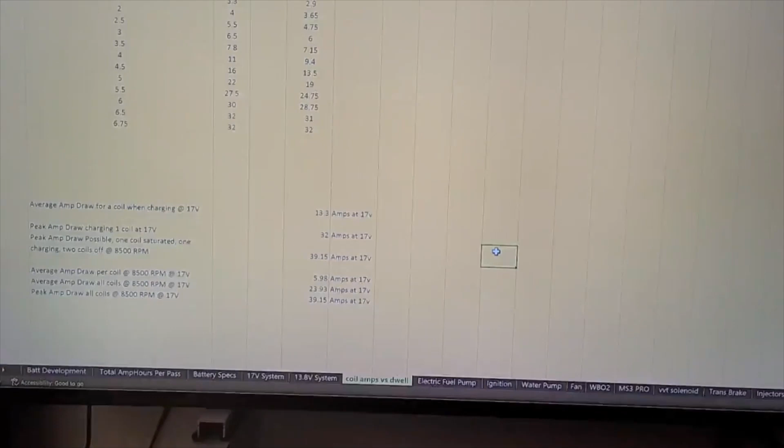We're going to answer how much power does each individual component pull, and the two big questions: what is the average amp draw for one race, and what is the peak amp draw? Both of those numbers matter. The average is for battery size, but the peak, the system's got to be able to supply that peak power.

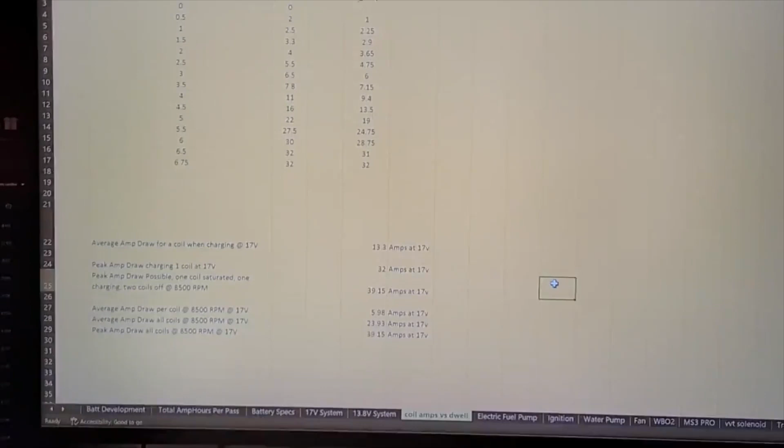So let's take a look. We already covered the coils in the last video, so we'll just summarize. The average draw is 13 amps, and our peak draw is about 39 amps.

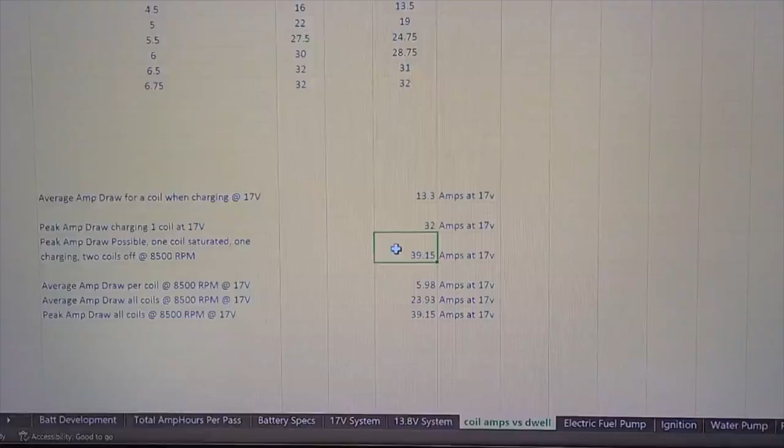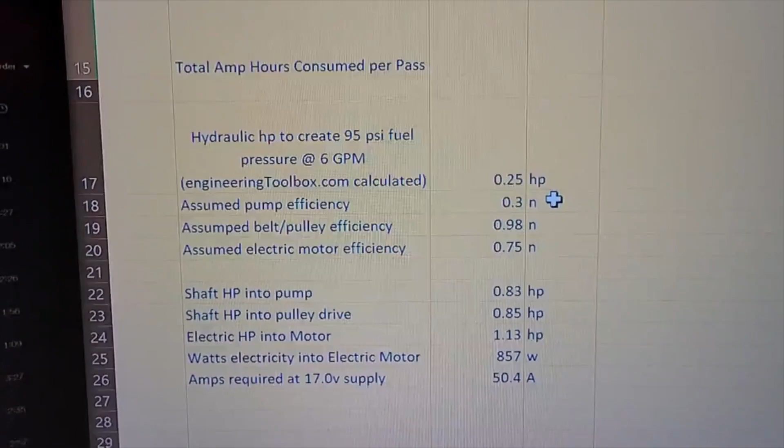Now let's go to the fuel pump. We're going to run a 6 gallon per minute pump at about 95 psi. I used a calculator online and plugged in the numbers, and that takes about a quarter horsepower to create that much flow at that pressure.

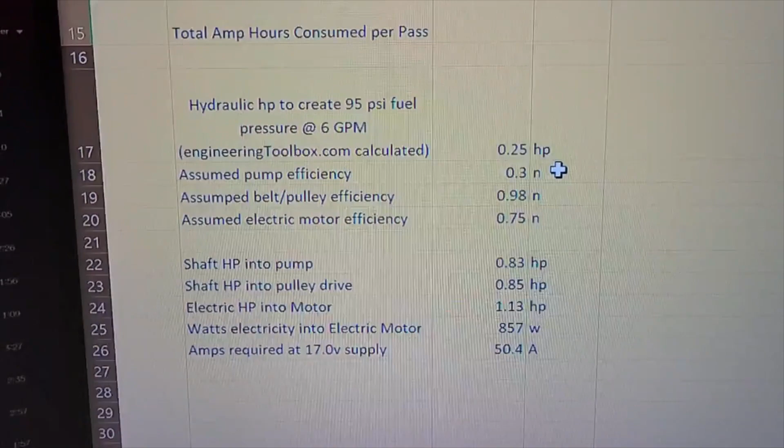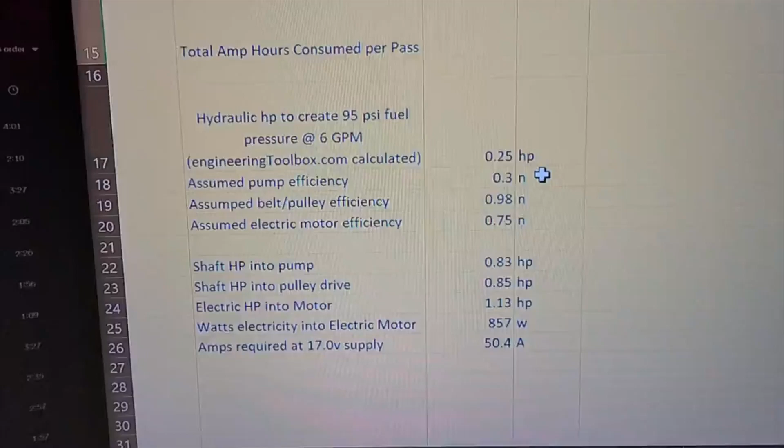That's hydraulic horsepower. Now for pump efficiency, we're assuming a terrible 30% efficiency. We hope our pump is better than that, but we are pumping thin fuel and I don't really know what the efficiency is, so I assume something terrible. Because of that, we also put the belt and pulley, because we're going to have to run that, so we got that at 98% efficient. And the electric motor, we got that at 75% efficiency.

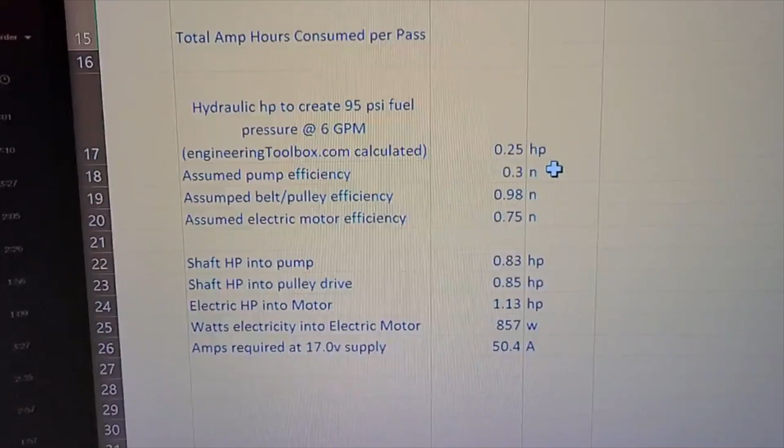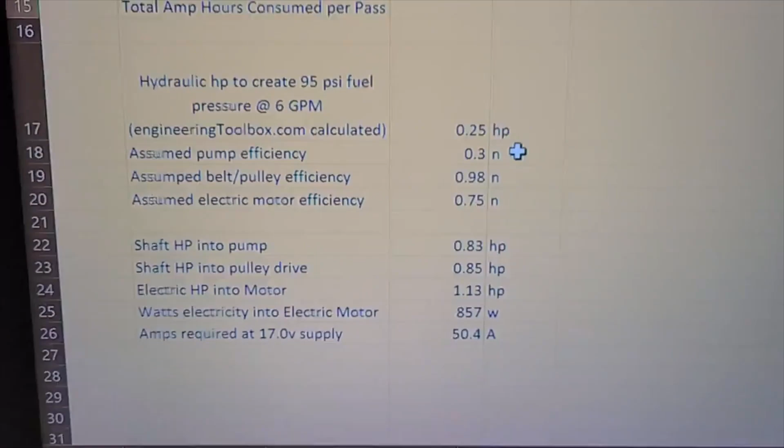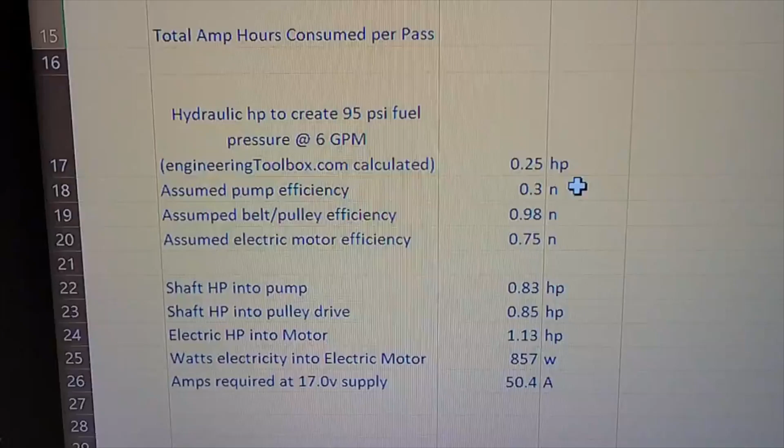So when you take all that into account, what you find is our shaft horsepower going into the pump is about 0.83, and that's because of the terrible efficiency. That number just goes up from there. Doing the pulleys bumps it up to 0.85, and the electricity going into the motor to create that shaft horsepower, due to the motor efficiency, we're up to 1.13.

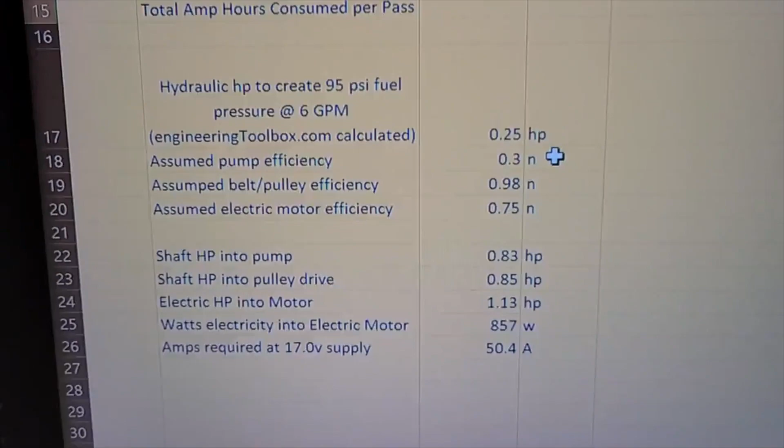Converting that into watts, that's 857 watts, and if you're supplying 17 volts, that's 50 amps. So at 17 volts, the electric motor is going to pull 50 amps. Now like I said, it's probably worst case. Hopefully it'll be less because the efficiency is not so bad, but let's roll with that.

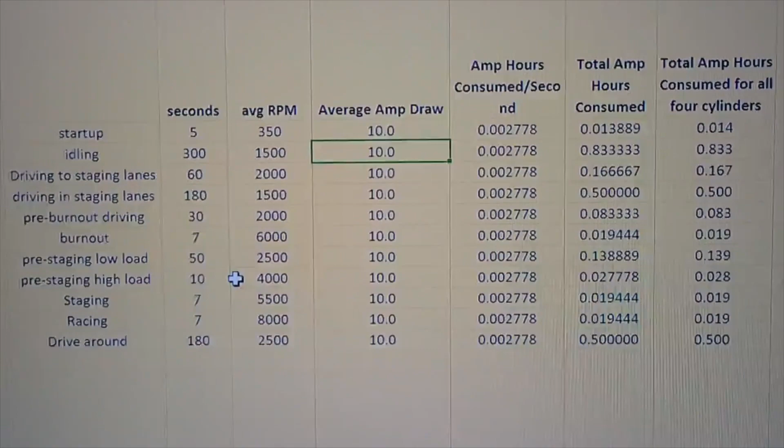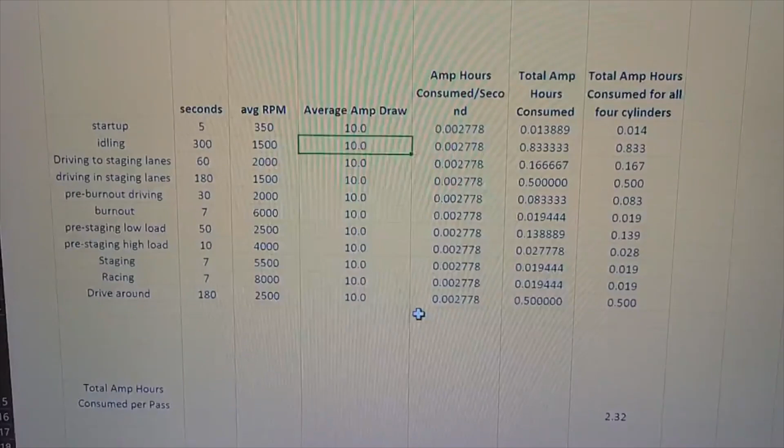We already covered our ignition. Let's jump over to the water pump. This one's pretty easy. I found a water pump that pulls, it says 10 amps max, but typically 9 amps. But hey, it says 10 max, so let's go with that. We're just going to assume that we run the pump at full speed all the time, which is probably what we're going to do anyway. So that's real simple, 2.3 amp hours.

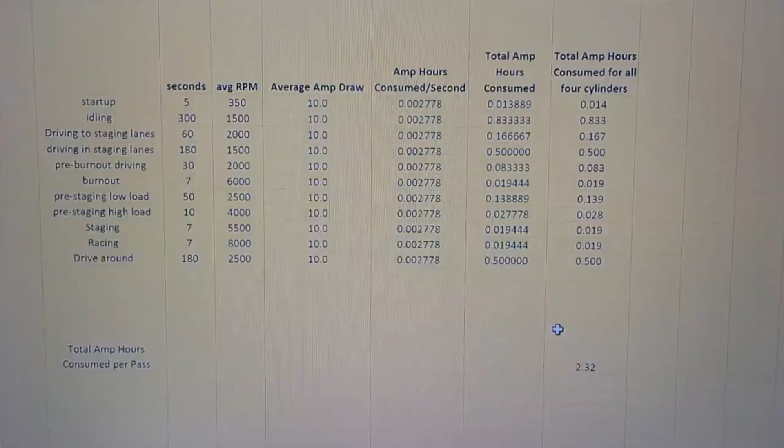We'll go to our fan. Same thing, it's a cooling system component, so we're just assuming 100% cooling at all times. We may not actually do that, but I want a system that I have full cooling, and I take that into account.

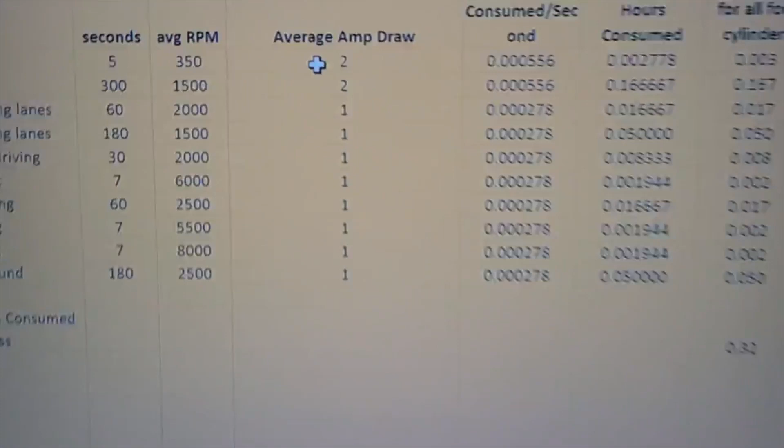Next tab is our wideband. So widebands, these things start off pulling more current because it's got to heat the sensor up, but after that they don't run as much. So you can see we backed off on that. We ended up with 0.32, so not too much.

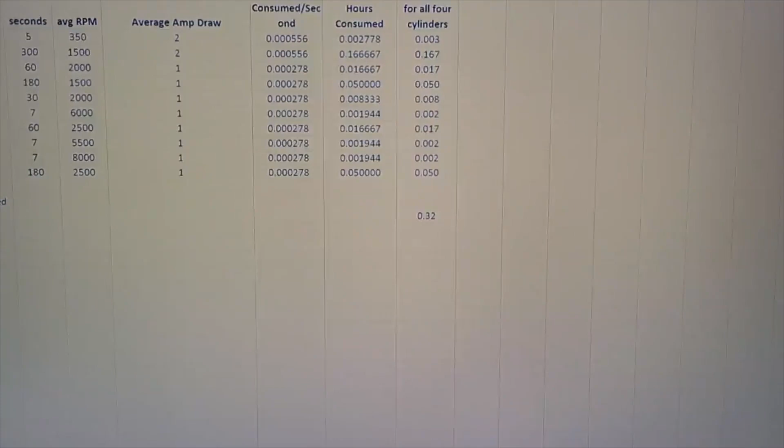Next is our ECU. We just did 1 amp. I couldn't actually find a number for this, so I just assumed 1 amp. That's probably close. That gives us 0.23.

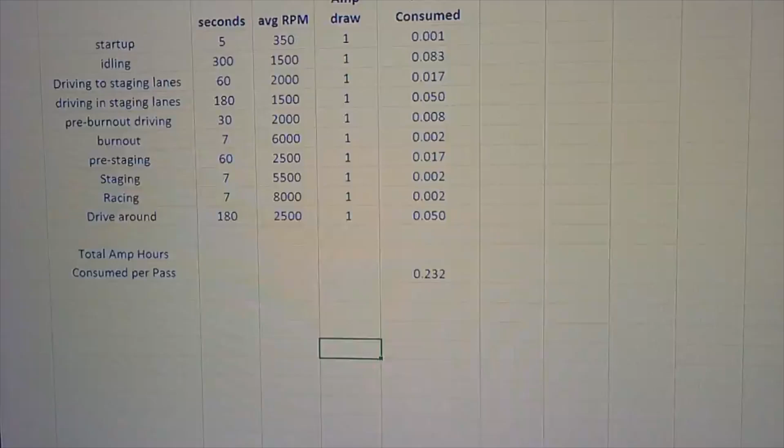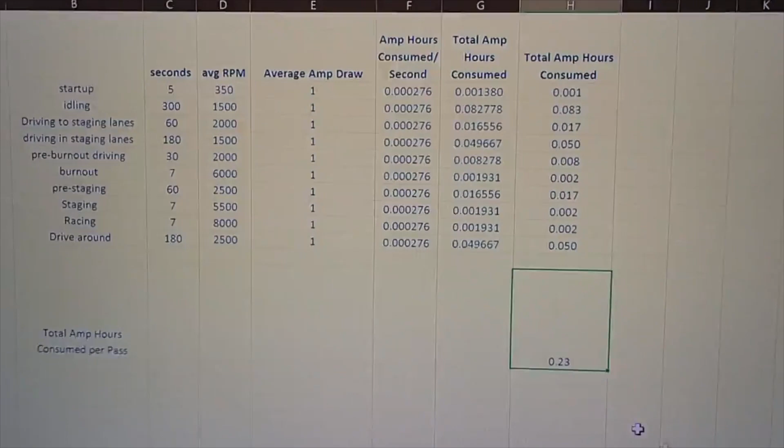Next we got our VVT. I don't actually know this number either, so I just put an amp, and it only comes out to 0.23, but I mean it's not much. That's like a quarter of an amp hour, so if we're off a little bit, not a big deal.

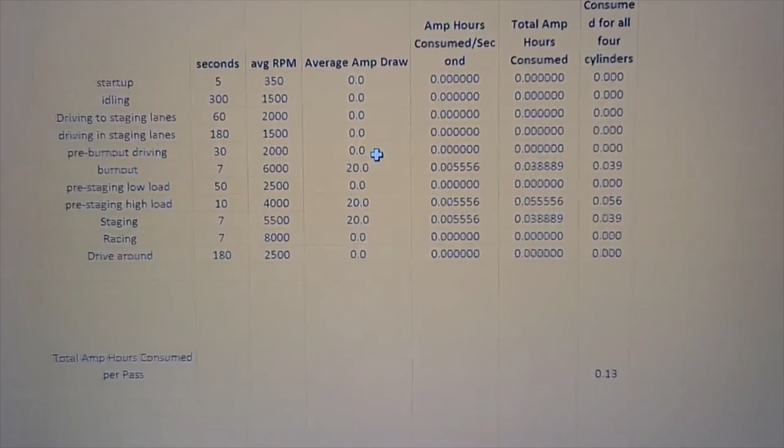The pre-stage and staging, we've got 20 amps for each, so that's basically 1 minute total. I doubt we're going to do that much, but we're trying to budget for worst case. So that gives us 0.13, not really much anyway.

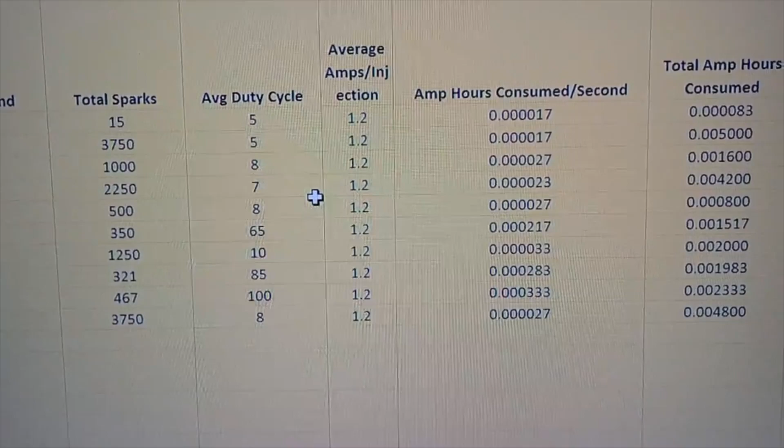Go to the injectors. We're doing 1.2 amps per injector, and we do have 4 injectors. But most of the time the duty cycle is low. You can see here in our graph that we actually took duty cycle into account when we were doing our calculations. It only ends up being 1/10 of an amp hour, not much.

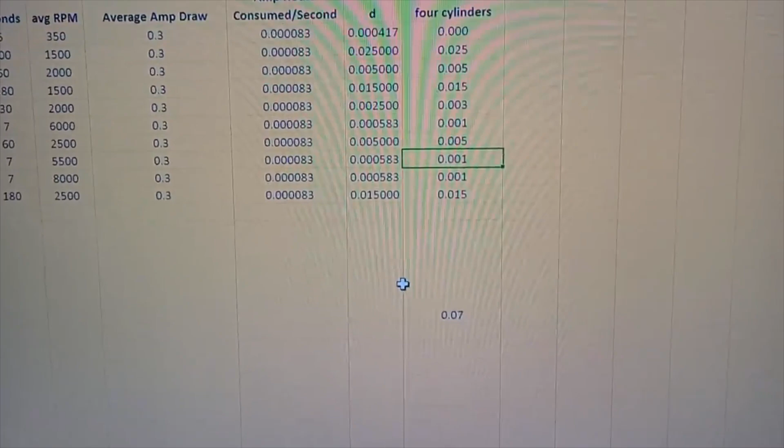Last thing is our running lights. We just did 0.3, we're going to do an LED conversion, and it ends up being some tiny number. All right, so that's our pieces. Now let's go into, we kind of got 3 things.

We got a 13.8 volt system, a 17 volt system, and then we'll look at the battery. So let's go to our 13.8.

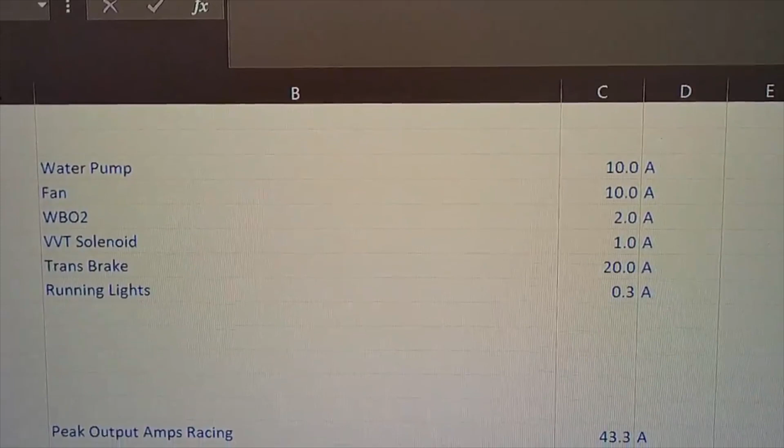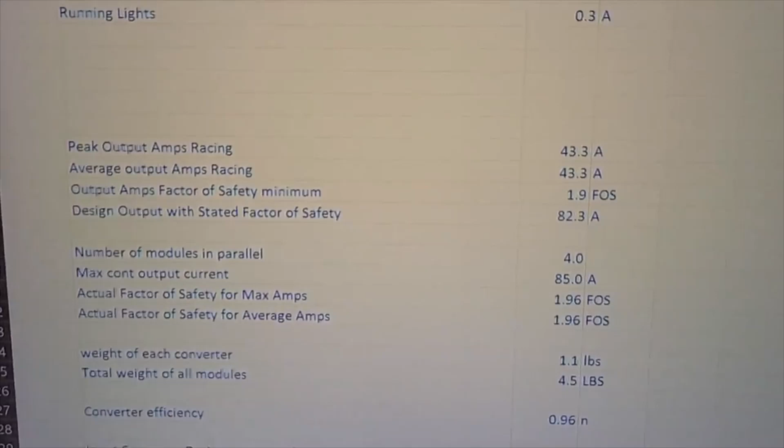So here's our amp numbers, these are the peak amps. Well actually in these parts the peak and the average are basically the same. So we look down here, here's our peak and our average, around 43 amps.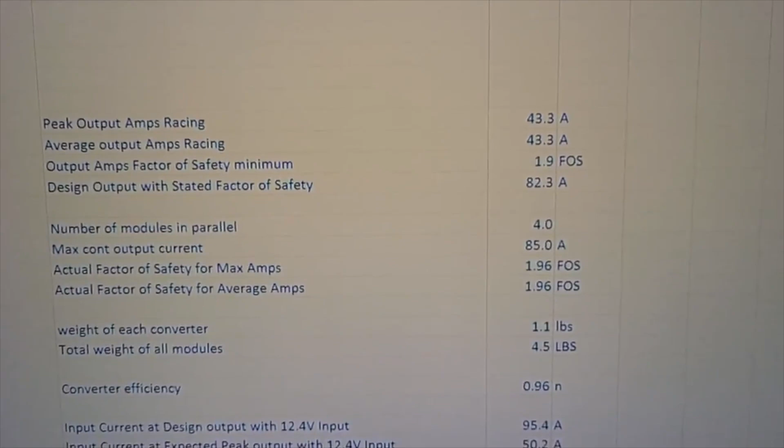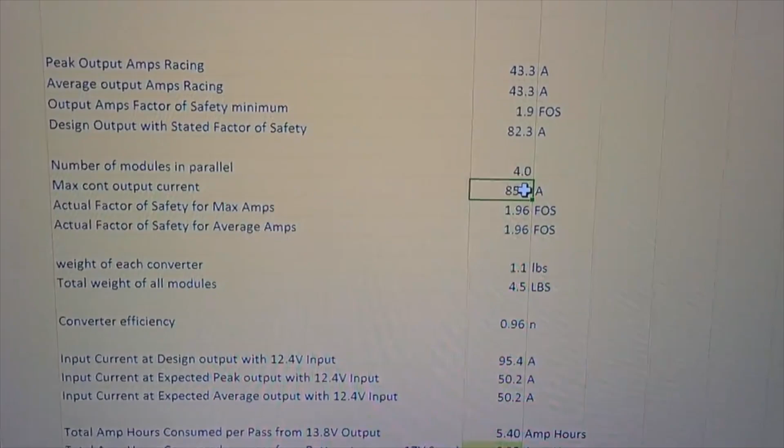Now I'm putting a factor of safety of 1.9 on this, so that means we're calling out for an 82 amp design output. Now the pieces that I'm using, I got to put them in parallel. They're rated for 25 amps each, but I'm derating those some just for reliability. So here I assumed that we run them at 85% of their 25 amp rating.

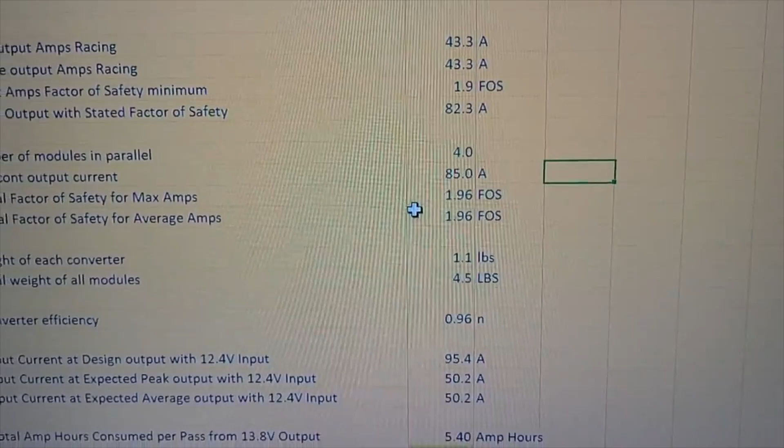So 4 of those, we end up with 85 amp output, which gives us a factor of safety of 1.96. So this thing's basically double what it actually needs to be, which is good because if we ever add anything in the car, we've got that extra amp capacity.

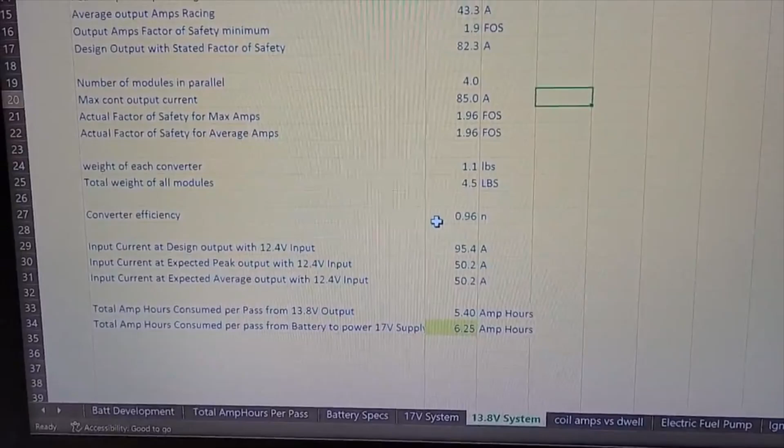Here you can see the weight of these parts is about 1 pound a piece. These are pretty efficient, 96%. And then check this out, here's our input current at the design output with a 12.4 volt battery supply.

So we'd actually be feeding these things with 95 amps. Now that's to get the 85 amp max output. However, if we just look at our expected numbers without the factor of safety, then we're looking more at about 50 amps going into this thing, and that's from the battery.

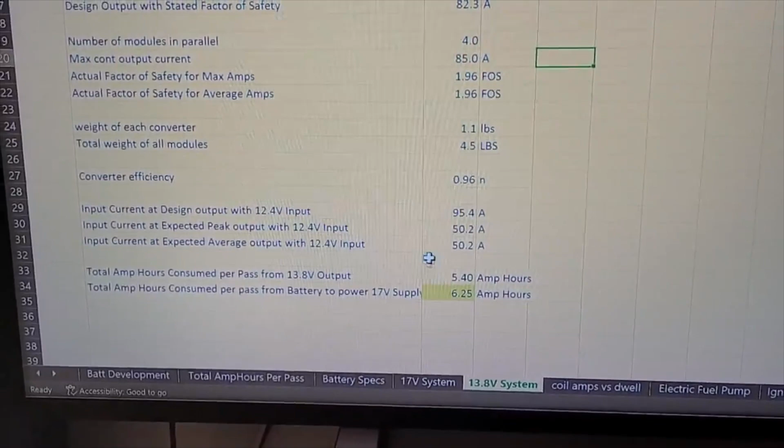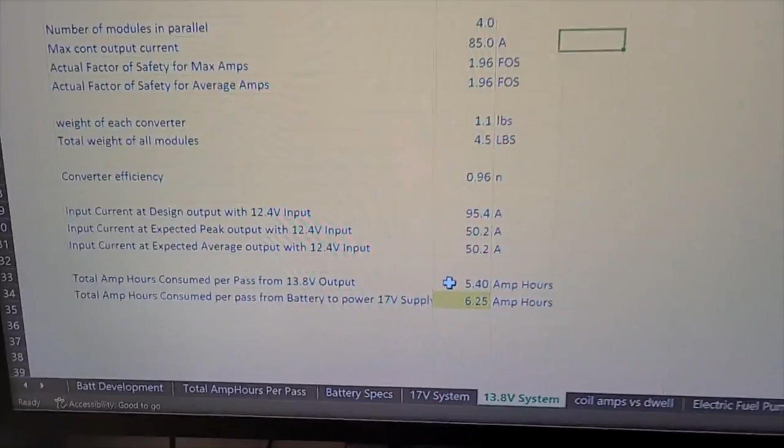And then down here at the very bottom, this is our amp hours. So since we're not going to take an hour to make a pass, it's only going to be a few minutes for all the driving. It ends up being 5.4 amp hours coming out, or that's the output to feed everything. So from the battery, it ends up being 6.25.

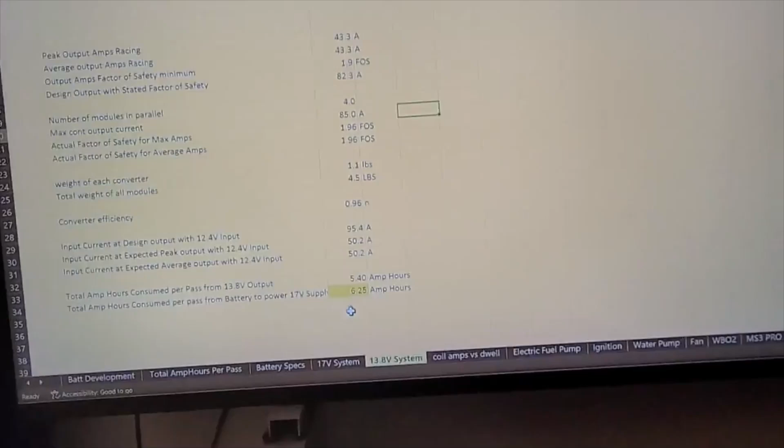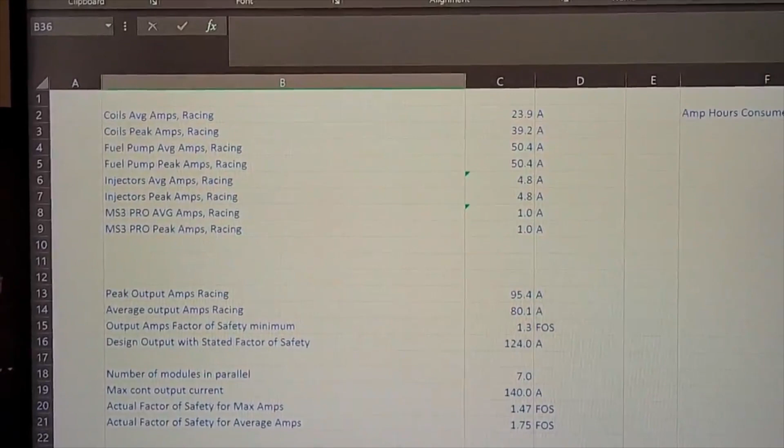So not too bad. Let's jump over to the 17 volt system. So here you can see our coils. We have different numbers for average and peak, but everything else, the averages and peaks are the same. So we have to take that into account.

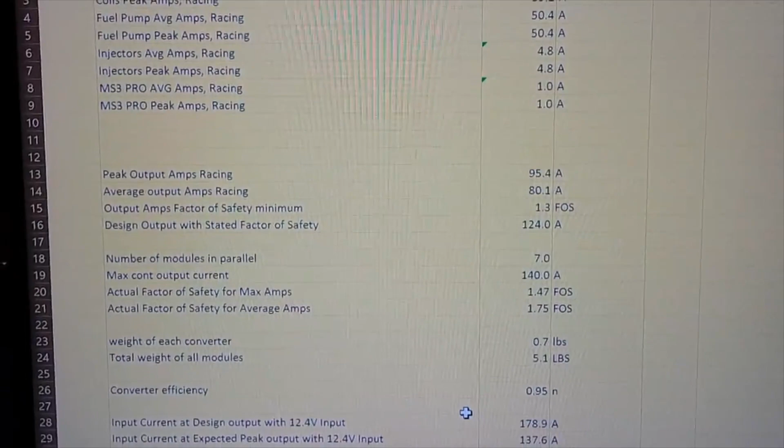But these are big numbers. You can see compared to that other one, we're looking at big numbers here. So our peak output when racing, we're looking at 95 amps, and again that's at 17 volts, but an average of 80.

So we threw a factor of safety of at least 1.3, and that puts us at a design output of 124 amps. I'll admit I kind of want to bump that factor of safety up, but let's run with that for a second. So here you can see we have to spec 7 of these guys.

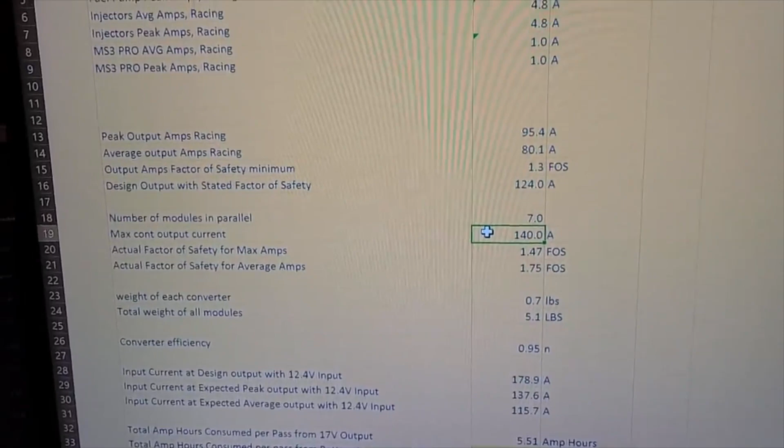We're using 20 amps a piece. They're rated at 22, but we're derating them a little to 20. So that gives us 140 amps of output, which means our factor of safety for the maximum current is 1.47, and for the average, 1.75. So that's actually not that bad.

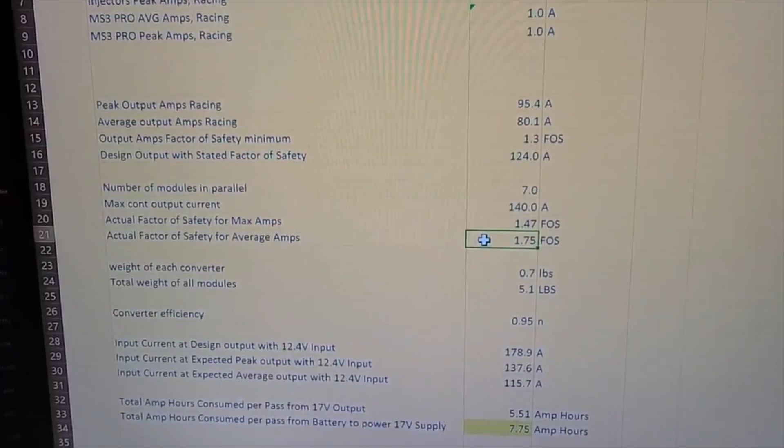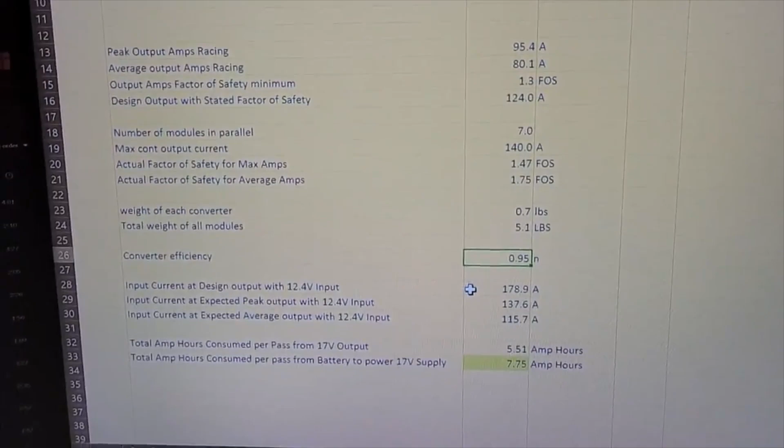These converters are 0.73 pounds, so we end up with about 5 pounds of converter. Assume 95% efficiency, which is what they publish. Look at these numbers, this is high.

So the input current at the design output, this is how much current the 17 volt system pulls when it's running at its designed output amps and you're feeding it with a 12.4 volt signal. You get 178 amps, basically 179 amps feeding into this thing.

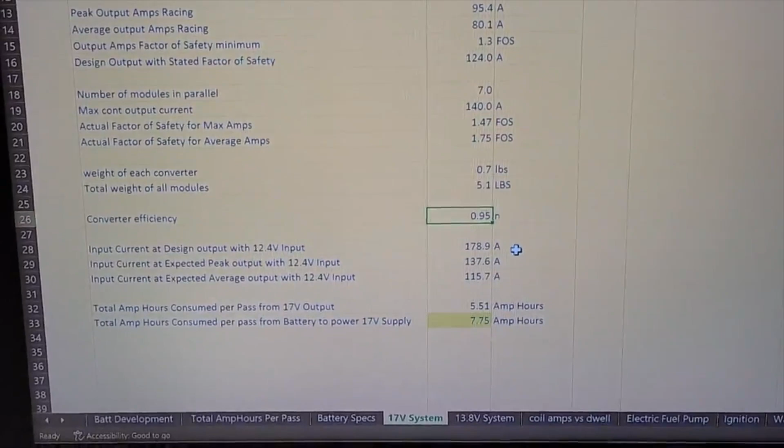Pretty damn high. And then you can see input current at the expected peak output is lower, 137, and then with the average number it's 115. So that's 115 amps coming off the battery. And last but not least, we can see our amp hours, we're looking at 5.5 amp hours from the 17 volt system.

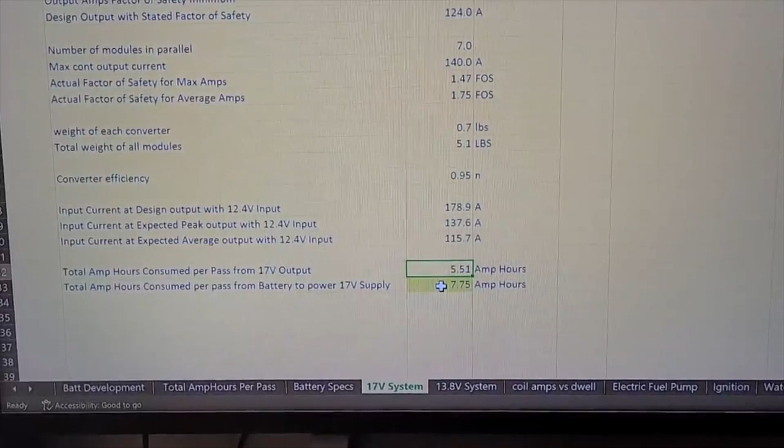That's at 17 volts. When you convert that to battery voltage, it ends up being 7.75. So if we go to this last piece, total amp hours per pass, when we add those two numbers together, you get 14.

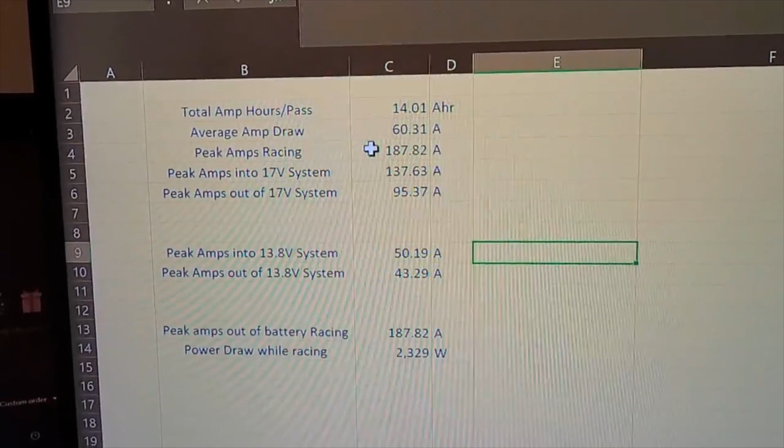And our average amp draw for the whole time is 60 amps. But our peak, look at this number, 187 amps. This is the killer. Those peak amps are so high.

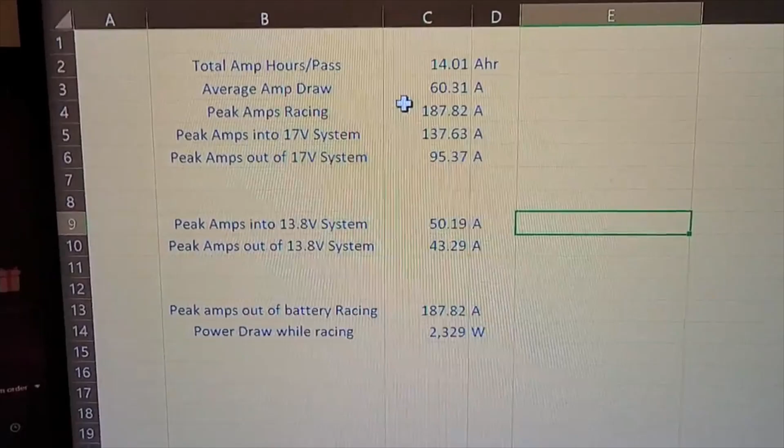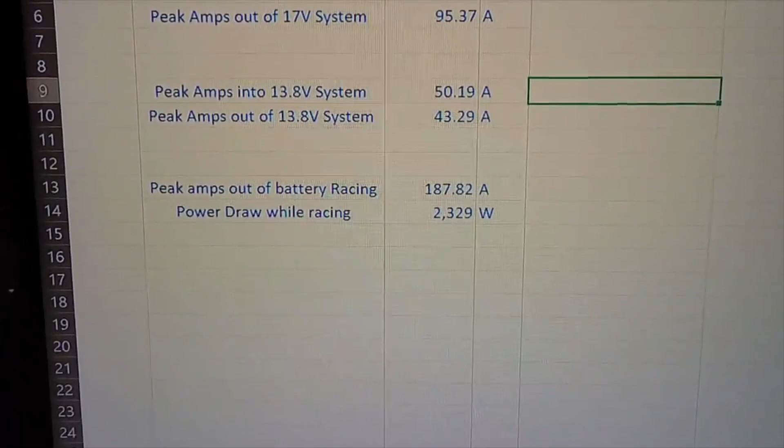And you can see our peak amps in the 17 volt system is 137 with 95 going out. And then going into the 13.8 at 50, coming out at 43. Like we said, 187 amps total coming out of that battery. Jesus, that's a lot of amps. And that's actually 2.3 kilowatts. So wow, that's a lot of power.

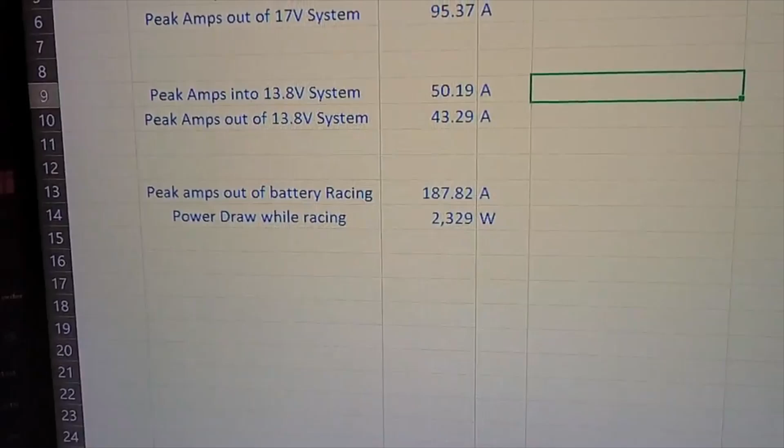So that was the point. We did all this stuff. This is worse than I thought it would be. But this is the reason we did this. It took so long. But my car is going to pull 187 amps. There's no headlights, there's no brake lights, there's no HVAC, no stereo. I mean, this is just the bare bones stuff, and we're pulling 187 amps.

So if I go back and look at what I was planning on doing, I had planned to just keep the stock alternator and then put a battery. Then I looked at putting a bigger alternator, and I kind of came to the conclusion that I probably didn't need it. But that's clearly not the case. I mean, 187 amps, there's pretty much no alternator I can put on my car that's going to keep up.

And the ones that do, like the people that make alternators that'll put out that much power, they don't like high RPMs. So you have to pulley them to where they only charge at high RPM. They're not going to charge at idle, which kind of defeats the purpose of having an alternator. So there's not really a great way to solve that problem.

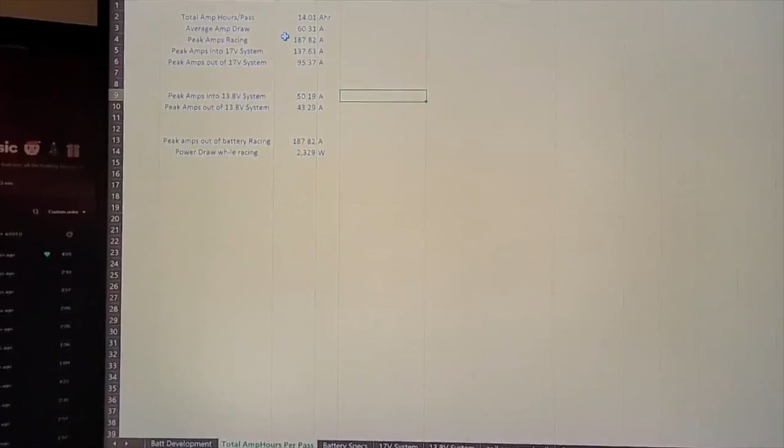But that really puts things into perspective, 187 amps. So now I know, not even starting the car - the starting amps are going to be high too - but just running the car, you're going to see some really high current draw from that battery. So we're going to use that info to spec out our battery to make damn sure that whatever we put in the car is going to meet these requirements.

And like we said, a lot of this stuff we did were peak loads and looking at worst case when you're racing. But that's how you design stuff if you want to know it's always going to work. You got to look at your worst case loads. You can't just look at averages.

I mean, if you tried to size a fuel pump like that, the average fuel flow rate is basically just above idle at a drag strip, maybe 50 horsepower worth of fuel or something. That doesn't work, because when you're racing, you're burning a lot of fuel. So you got to look at this stuff.

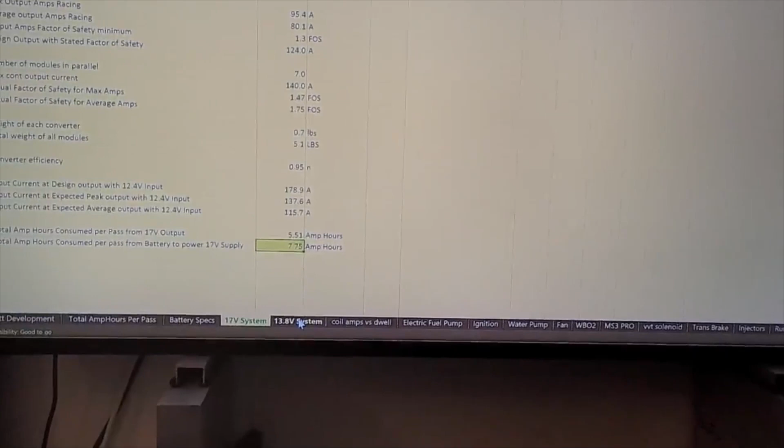And this took a long time to do, but it's definitely paid off. I've actually gained quite a bit of insight into efficiencies of how these systems work. Like, I'd always wanted to try a high voltage system, but I didn't know how much weight it would be, how many amps it was going to pull.

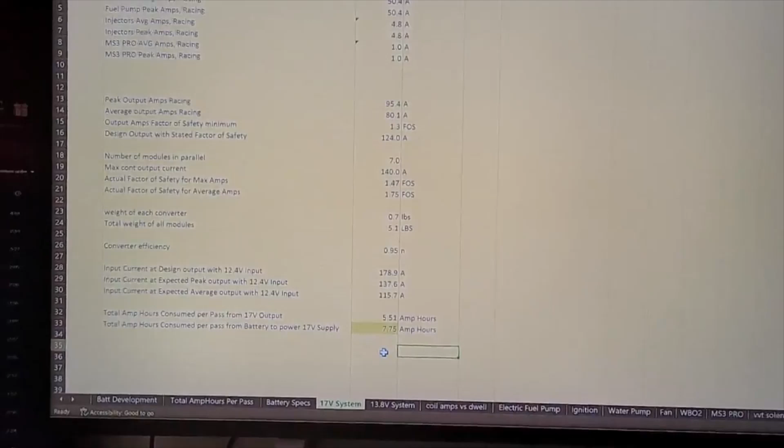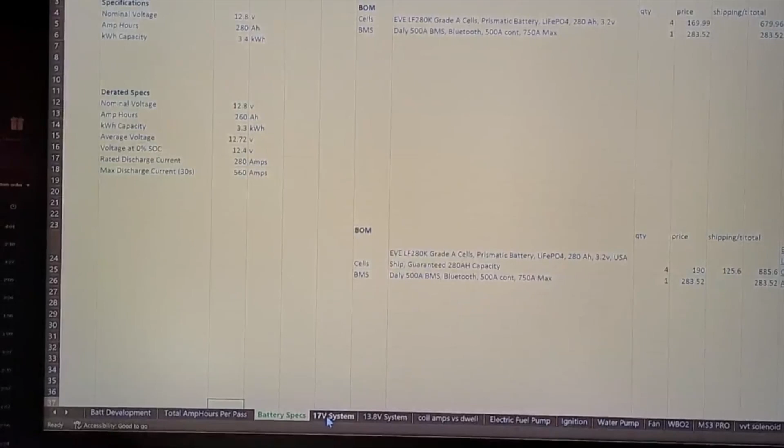And it's kind of a good thing I never tried this before, because I would have never had the electrical system to support this. So it's kind of good news that I think our battery is going to be able to support this. So that's kind of cool. But you can see here, I think we already talked about it, but it's rated for 280 amps. We're going to need those. So I think we're going to be good.

But hope y'all like this. This gives you some insight into a little bit of electrical engineering for speccing out a race car and knowing that what you're putting in the car is going to be adequate.